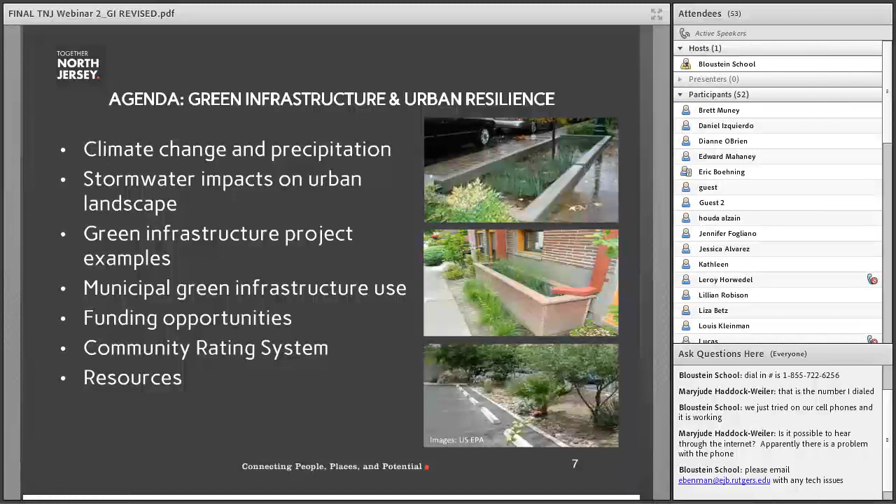This second webinar of the series will focus on the relationship between urban resiliency and green infrastructure with the following sections: climate change and precipitation, stormwater impacts on the urban landscape, green infrastructure project examples, municipal green infrastructure use, funding opportunities, the relation to the community rating system, and finally, the resources mentioned throughout this webinar are gathered and listed on a resources slide at the end of the presentation.

According to NASA, the distribution of the world's rainfall is shifting as our climate changes. Wet areas may become wetter, drier areas drier, and storms more intense, leading to more chaotic weather around the world. The average precipitation in the country has increased since the beginning of the last century, with more winter and spring precipitation projected for the northern U.S. for this century. In the Northeast specifically, heavy precipitation events have increased exponentially and are expected to continue.

NASA lists regional effects in the Northeast to include heavy downpours, growing challenges on infrastructure and agriculture, and increasingly compromised fisheries and ecosystems. This map, taken from the National Climate Assessment, shows the Northeast experiencing a much higher percentage of heavy precipitation when compared to other regions of the country.

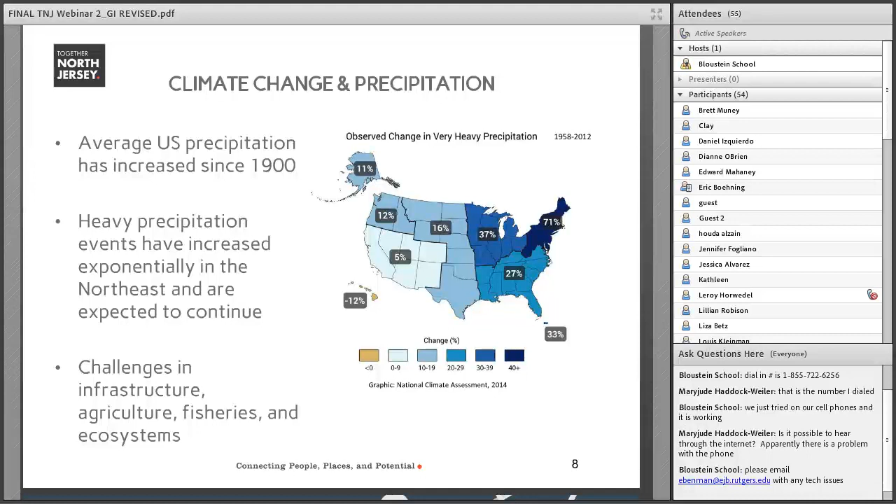In the following section, we will discuss stormwater impacts on the urban landscape. Stormwater runoff is generated from rain and snowmelt events. During these events, water flows over impervious surfaces instead of being absorbed into the ground. Impervious surfaces are mainly artificial structures, such as pavements, roads, sidewalks, driveways, and parking lots, as well as industrial areas such as airports, ports, and logistics and distribution centers, all of which use considerable paved areas that are covered by impenetrable materials such as asphalt.

Impervious surfaces also include the rooftops of buildings and homes. During a rain event, rainwater generally either remains stagnant or travels down streets into the municipal storm drain system. With sudden heavy downfalls, storm drains can become overwhelmed and can lead to localized flooding.

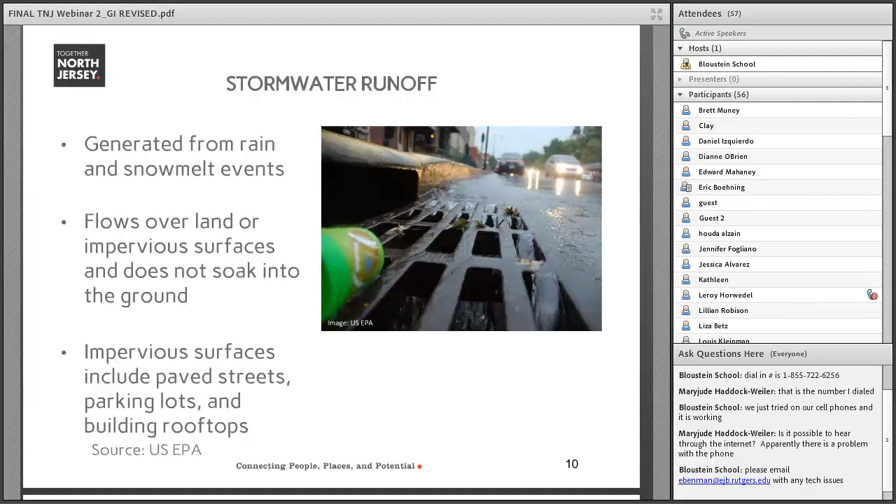Stormwater runoff can negatively impact all areas, but particularly urban areas due to the higher levels of development and infrastructure present. Stormwater runoff causes flooding and pollution, which then causes property damage, health and economic impacts, which result from the flooding of homes, as well as infrastructure damage to roads, bridges, and rail.

This infrastructure damage can lead to disruption in the public transportation system via delays and closures, and the need for costly fixes and upgrades, as well as water quality degradation, which can impact aquatic life and the operation of public beaches and parks.

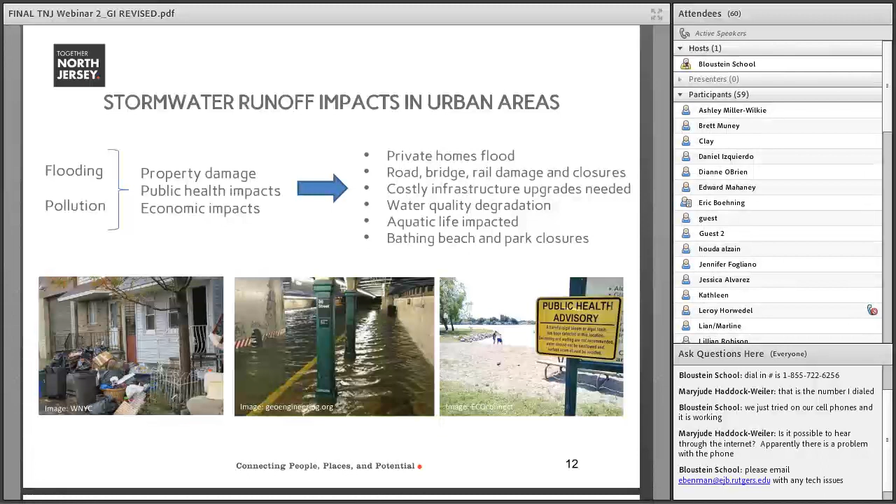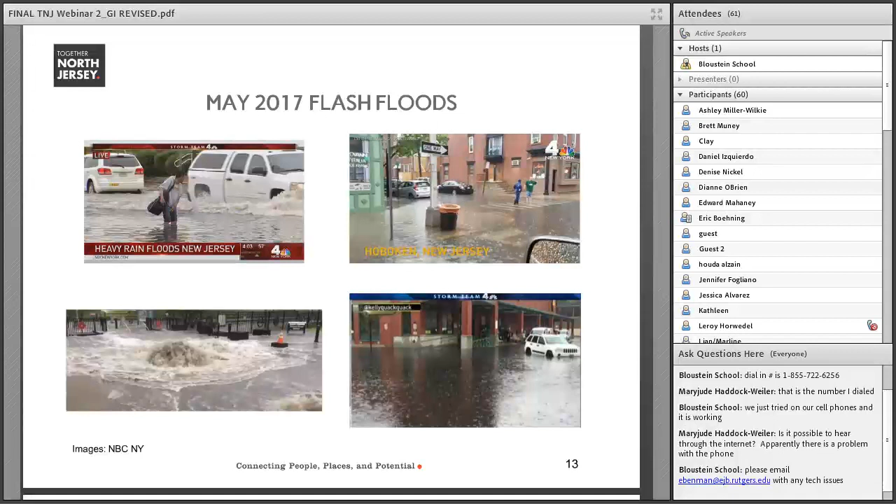These are pictures taken from news reports a year ago in May 2017, showing the impacts of a flash flood event in Jersey City, the pictures on the left, and Hoboken, the pictures on the right. You can see storm drains overwhelmed, cars nearly floating down the street, and residents walking knee-deep in flood waters.

So how do we address problems created by stormwater? One way is to integrate green infrastructure, commonly written and referred to as GI, into local development practices. Green infrastructure projects are intended to capture stormwater on-site, filter it through a natural system, and have the water absorbed into the ground instead of remaining on pavement where it can lead to flooding.

Green infrastructure also promotes the capture of rainwater for reuse, such as irrigation. Examples of green infrastructure projects are listed on this graphic and include local collection systems such as rain barrels and absorption systems like bioswales and pervious pavements.

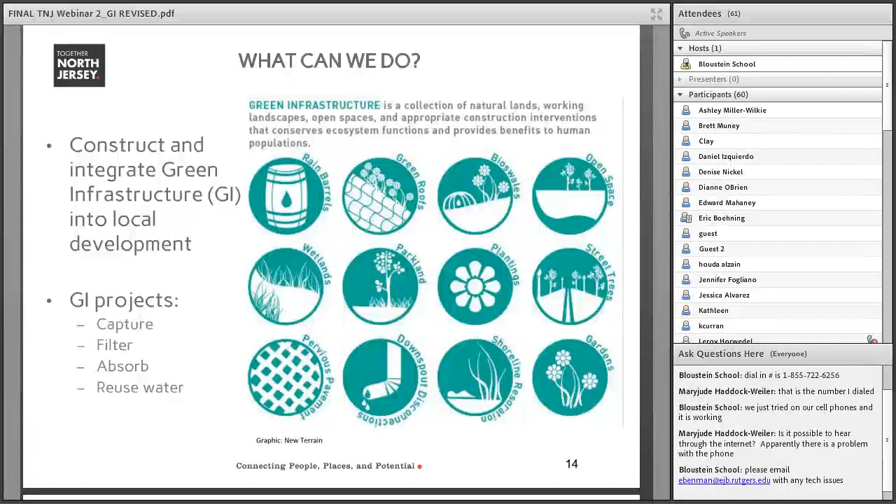When discussing stormwater management, we often refer to green and gray infrastructure. Generally, individuals are familiar with gray infrastructure, which consists of engineered drains, pipes, and walls. Green infrastructure, on the other hand, uses various kinds of vegetation and other natural processes to perform the functions of gray infrastructure.

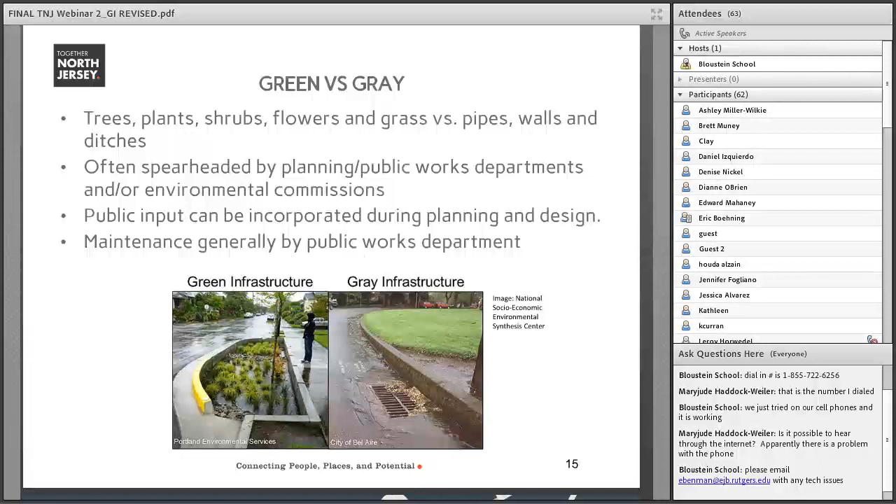Local green infrastructure projects are generally spearheaded by planning, engineering, and public works departments and environmental commissions, with maintenance performed by the engineering and public works departments. Municipalities can also incorporate public input into green infrastructure on public projects. An example of this could be holding a public visioning session or accepting public comments on tree plantings along Main Street.

In the next section of the webinar, we'll take a look at some green infrastructure project examples. Green streets include rain gardens and vegetated areas that collect and absorb runoff from the adjacent street, sidewalk, and parking lot areas. Since they are small in scale, they are ideal for dense urban areas where existing green space may be lacking and opportunities for new green space are limited.

Benefits of green street design include stormwater management, but also aesthetic appeal that may make the area more inviting to pedestrians, which in a downtown area can mean more foot traffic and pedestrians lingering longer, potentially leading to economic development value for local businesses.

Incorporating green infrastructure into streetscapes should include small street trees that do not obstruct streetlights and short vegetation that would not obstruct the open sight lines of motor vehicle traffic or pedestrians.

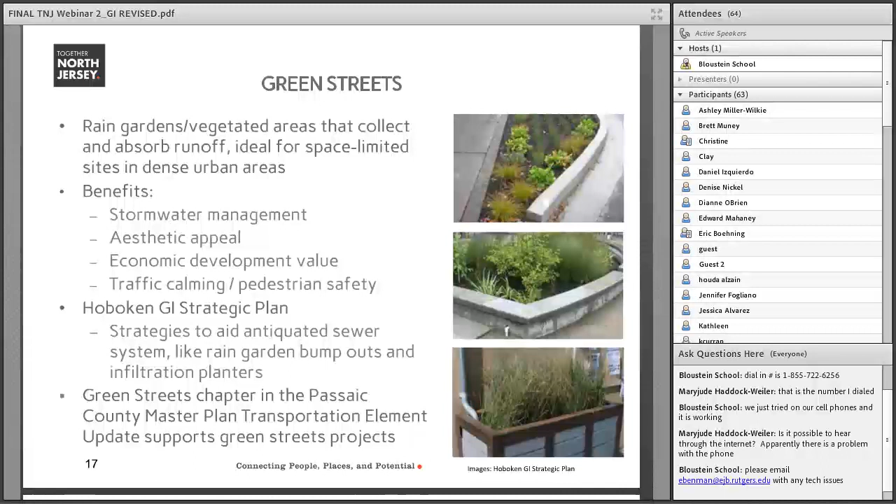Green alleys are alleyways that are repaved with permeable pavements and/or including vegetation that allows stormwater to infiltrate into the ground on site instead of ponding in the alley or moving onto the adjacent sidewalk area. Along with stormwater management, green alleys can also contribute to public safety by creating a more inviting space for residents or patrons and workers of local businesses. Green alleys can also lessen the prevalence of standing water and assist in managing vector-borne diseases.

The City of Chicago Green Alleys program started as a pilot project in 2006 and had resulted in the installation of over 100 green alleys through 2010. Green alley techniques used in Chicago include proper grading to facilitate drainage, the use of dark sky-compliant light fixtures to reduce light pollution, and the use of recycled construction materials.

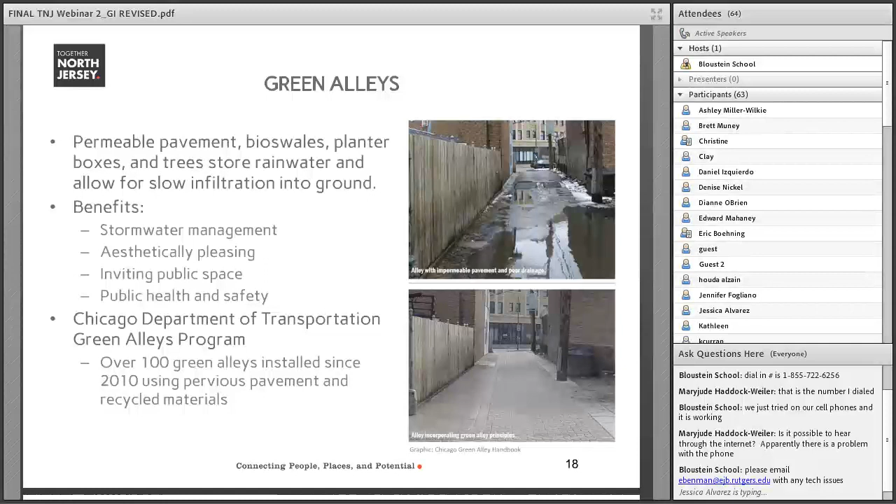The 2010 Green Alleys Handbook describes the approximately 1,900 miles of public alleyways as one of the most important and extensive pieces of infrastructure in the city, resulting in nearly 3,500 acres of paved impermeable surfaces. The program provided an opportunity for the city to better manage this resource while protecting the environment and assisting with localized flooding.

Green roofs and walls are those that are carefully designed and covered with vegetation. It should be noted that in most cases, engineering work will need to be done to ensure that the building or structure can safely and adequately accommodate the weight and irrigation needs of the vegetation. The American Society of Landscape Architects has written design guides to assist in the materials and plantings to be used for proper water capture and energy impacts.

Along with regulating the interior temperature of buildings, the American Society of Landscape Architects also estimates that a typical 2 to 3 story building could experience a 15 to 25% savings in summertime energy costs, and green walls can even reduce noise pollution by reducing the amount of sound reflected. In some places, green roofs are becoming opportunities for urban agriculture, which is a global and growing trend that can contribute to economic development, job creation, food security, and community building.

The Brooklyn Grange rooftop in Queens, New York, a formerly contaminated site, is now a 43,000 square foot farm on top of a 6-story building that grows vegetation as part of a local CSA or community-supported agriculture program. The farm grows food, educates members of the public through workshops such as Intro to Green Roofs and Beekeeping 101, and facilitates events such as team retreats, weddings, and other private events.

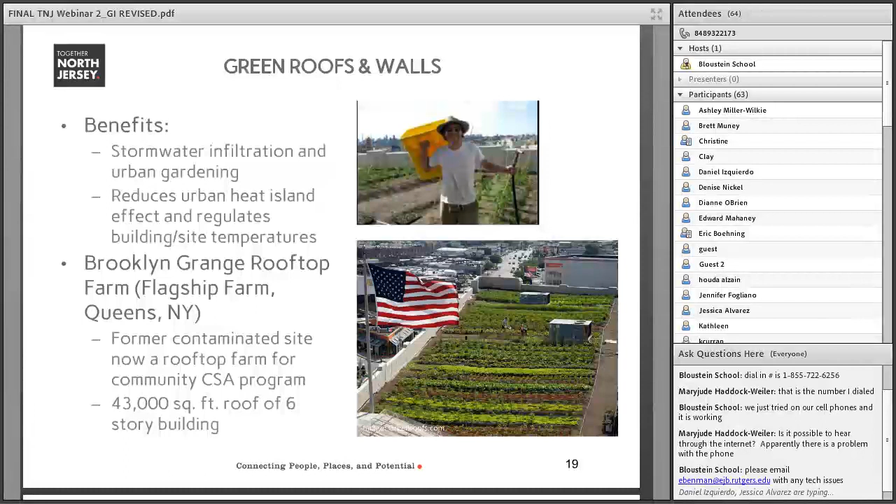Pocket parks are small-scale parks that are ideal for urban areas where space is limited. Typically, the size of a pocket park is the equivalent of 3 lots, and it is recommended by the American Planning Association to be no bigger than 4 vacant lots. Where the need for outdoor space is greatest, local governments and nonprofit groups can acquire small vacant lots and land occupied by derelict buildings, usually at low cost.

Along with the benefits of stormwater management, pocket parks are small and easily managed and maintained. They offer public health benefits with both passive and active recreation, so space to run and play, but also sit and relax in an otherwise bustling urban environment. Pocket parks can also address open space needs of municipalities where open space is extremely limited.

In Boonton, New Jersey, Kanouse Park is a pocket park with the rear of the lot located along Route 287. The park is located between the high school and a residential area and offers a few amenities for local residents, such as a swing set and a picnic table.

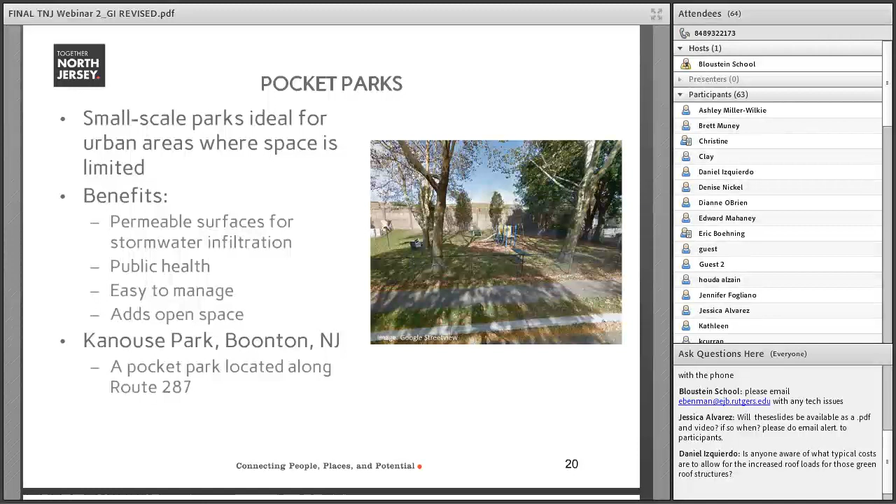Community gardens and urban agriculture are areas of collective gardening on individual or shared plots on either public or private land. Gardens and urban agriculture increase public access to healthy food, which can be crucial in areas that may be considered food deserts where access is lacking. Community garden and agriculture programs offer an opportunity for food and nutrition education to local residents. They instill a sense of community ownership because the space is taken care of by the residents themselves, and the gardens also offer habitat for pollinators.

An example of urban agriculture is seen with the Greater Newark Conservancy's Plotted Fresh program in Newark, New Jersey. Here, residents are offered plots for a small fee where they can grow healthy food. The plots are available for an annual fee of $9 for a 4-foot by 4-foot plot, or $15 for a 4-foot by 8-foot plot. Plotted Fresh also supplies startup materials such as seeds and technical gardening assistance for members. The program offers opportunities for education through a demonstration kitchen, nutrition programs, and field trips. The gardens are located at Hawthorne Avenue Farm, Smith Street Garden, and Sussex Avenue Garden.

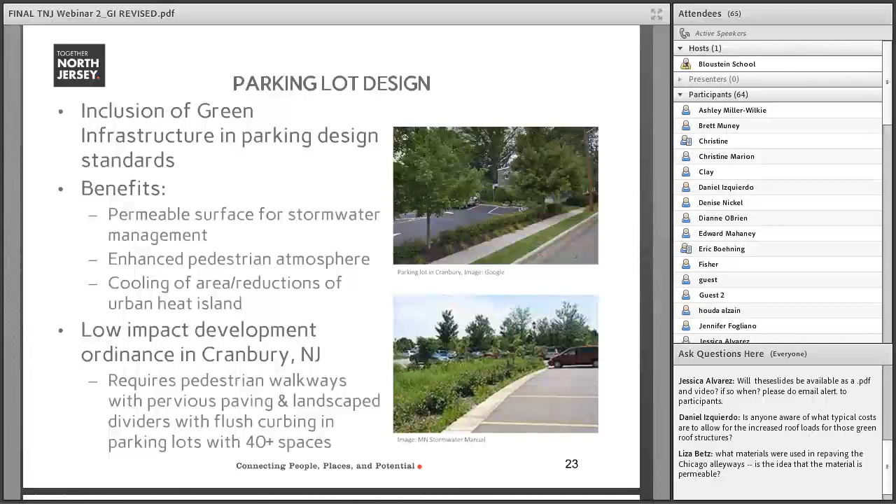Along with stormwater management benefits, green infrastructure can also be used to preserve community character. Beaufort, South Carolina, for example, has green infrastructure design specifications written into their local planning documents that are intended to maintain the character of the city. Historically, the landscape in Beaufort has included vegetated waterfronts that are easily accessed and inviting to pedestrians, which in this area includes both residents and tourists. Also common in the city are residential lots with ample trees and shrubs, often contributing to tree canopies over shaded streets and lush front yard gardens.

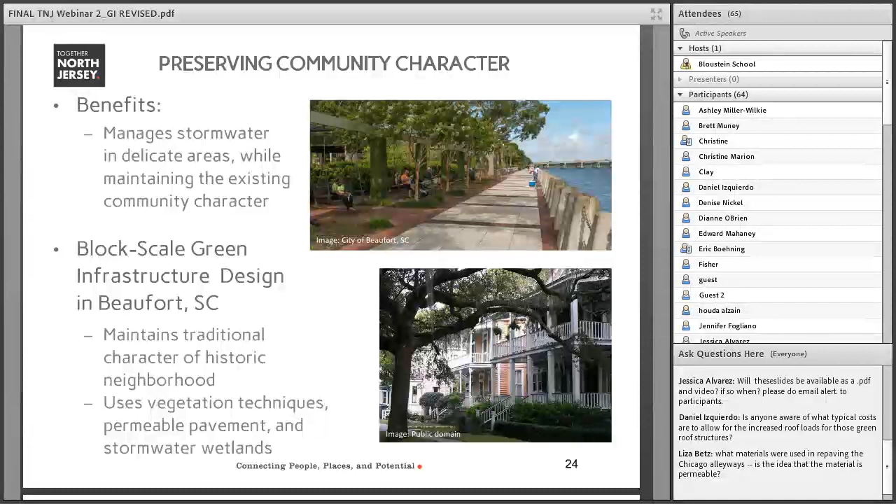Green infrastructure can also be an integral part of redevelopment projects. Along with stormwater management, redevelopment can offer opportunities for carbon sequestering and reduction of the urban heat island effect, as well as offer an aesthetic appeal that may have been lacking prior to redevelopment occurring.

In a project done by the collaboration of Camden, the Camden County Municipal Utilities Authority, Rutgers University, the New Jersey Department of Environmental Protection, the New Jersey Tree Foundation, and the Cooper's Ferry Partnership, a former contaminated gas station was transformed into a rain garden. The collaboration is part of the Camden, New Jersey SMART initiative, SMART being short for Stormwater Management and Resource Training. The initiative includes neighborhood green infrastructure projects, stormwater management policy development, and green infrastructure training programs.

According to their website, to date, SMART has completed 50 green infrastructure projects, planted 1,500 plus trees, engaged over 4,000 Camden residents, created over 45 partnerships, captured over 62 million gallons of stormwater, and has invested $25 million in the city since 2011.

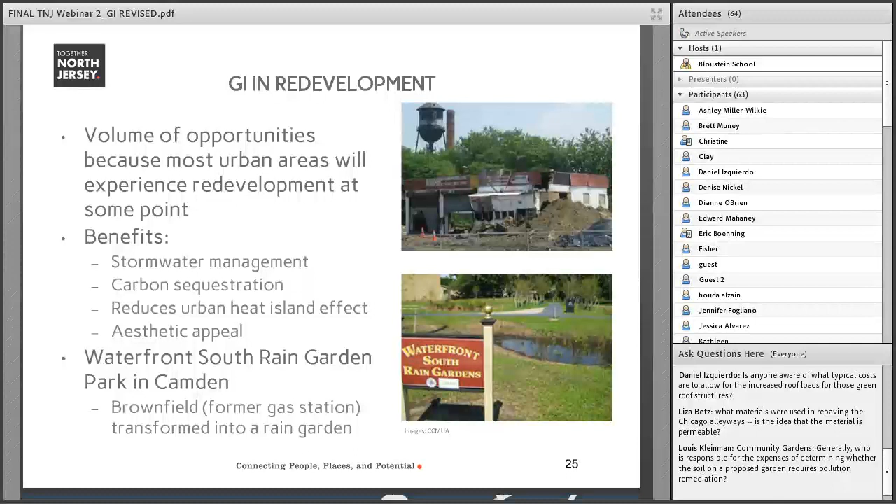In the next section of this presentation, we'll speak to challenges of implementing green infrastructure, offer more information on co-benefits beyond stormwater management, performance standards, costs, and how land use and zoning codes can be adjusted to better accommodate green infrastructure.

There are a few challenges that municipalities may confront in implementing green infrastructure. First, municipal officials may not be fully articulating the benefits of green infrastructure beyond stormwater management to constituents. This can be a problem if there isn't sufficient public support for the capital spending related to a particular green infrastructure project. Local officials may be better able to sell constituents on green infrastructure projects if the multiple and multifaceted co-benefits are well known and understood by the public.

Second, performance standards are not always known or easily understood by members of the public and sometimes municipal officials as well. We are generally comfortable with how storm drains and pipes work, and engineers are used to calculating the amount of stormwater that is carried by pipes of certain diameters, but less is known about the performance standards of green infrastructure. Third, green infrastructure may conflict with existing codes and/or land use regulation, making it necessary to obtain variances for green infrastructure-related projects on private property, which can be costly and time-consuming.

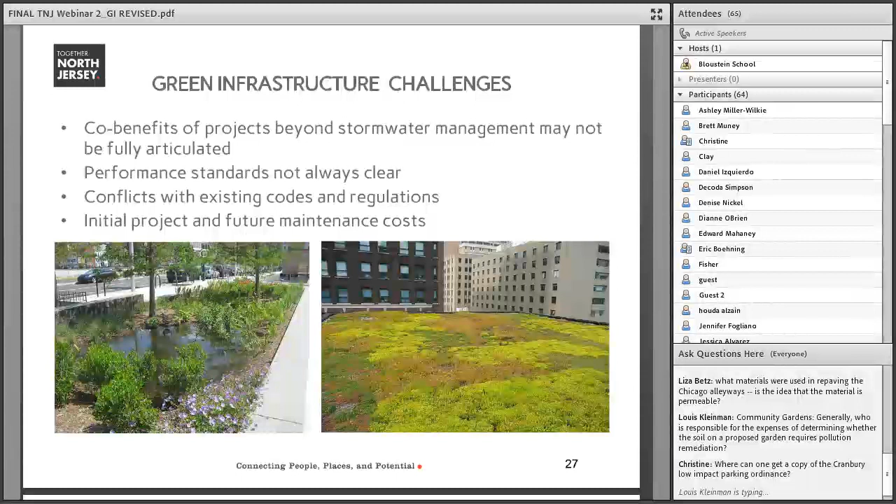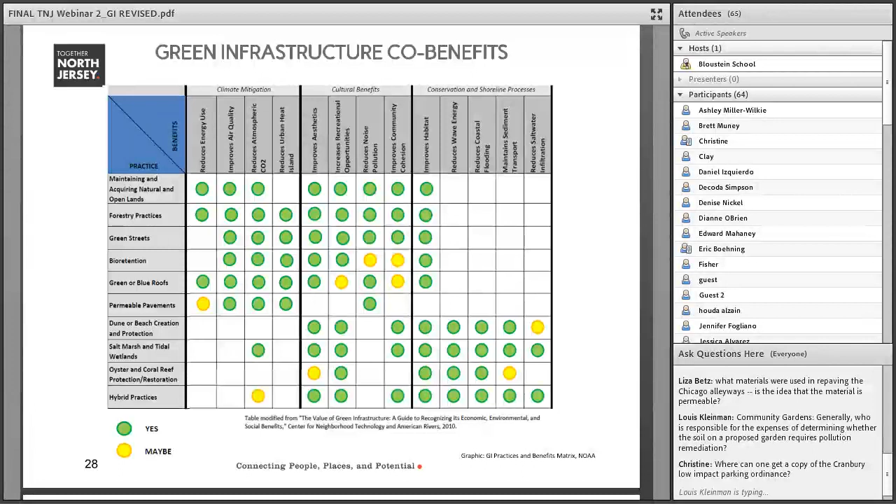With green infrastructure, there may also be implications for environmental justice. In less affluent areas, for example, there could be a benefit from green infrastructure when flooding and health-related issues are addressed, while creating green space in these areas where it may be lacking. Next, energy savings is seen in carbon sequestration, cooler building temperatures, and less stress on gray infrastructure. This can result in savings in utility costs and infrastructure upkeep and repair cost savings for municipalities.

Lastly, green infrastructure, specifically trees and vegetation, is also said to increase property values and create a more aesthetically pleasing environment. It should be noted that there are those who will link this to an area's subsequent gentrification, so it is important to keep in mind that green infrastructure can be done on a site-specific scale, but projects may have community-wide implications.

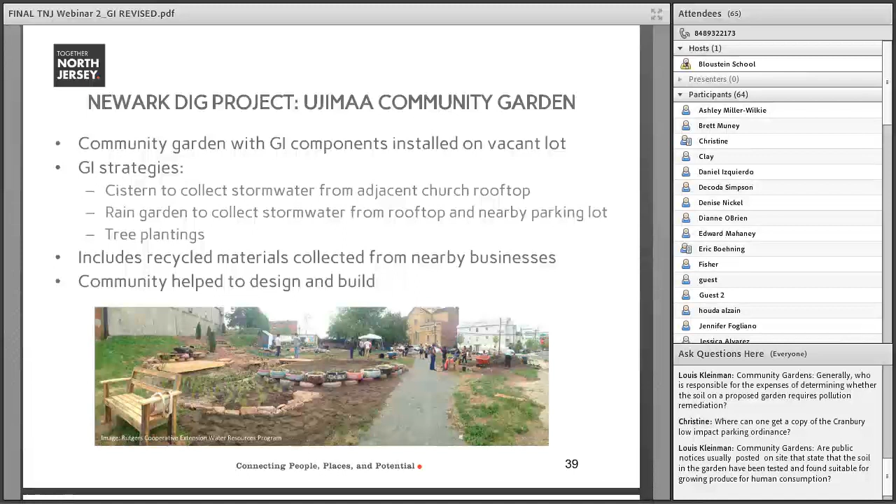The New Jersey Water Bank, formerly the New Jersey Environmental Infrastructure Financing Program, offers low-cost financing specifically for green infrastructure projects in combined sewer overflow or CSO communities. There is no submission deadline, and applications are accepted on a rolling basis. Funds are available for governments, utility authorities, as well as public-private partnerships.

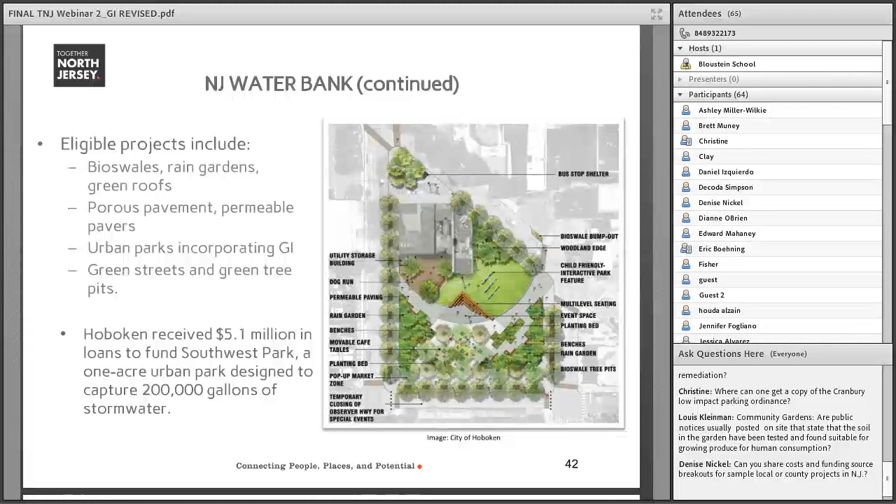For municipalities participating in the Community Rating System, or CRS, which is a voluntary incentive program that gives points to communities who exceed the floodplain management minimums of the National Flood Insurance Program, or NFIP, points are available for activities such as open space preservation, the adoption of regulations that may include the requiring of green infrastructure for all development, and the development of plans that include green infrastructure practices. If the community participates and local officials implement these program actions, homeowners within the community who have National Flood Insurance Program policies may receive a certain percentage discount on their flood insurance premiums.